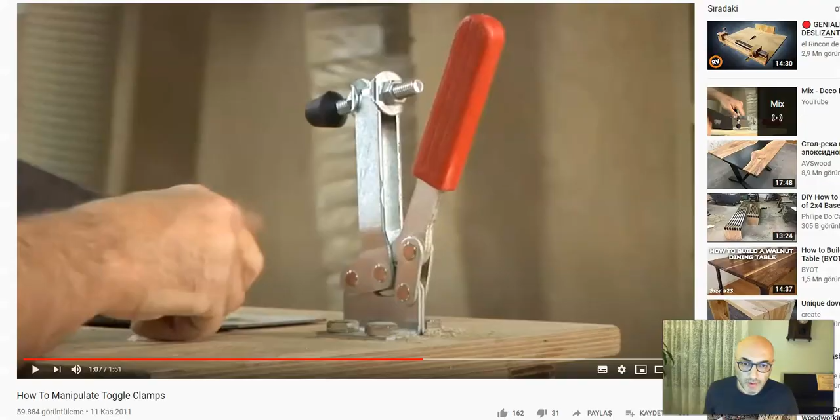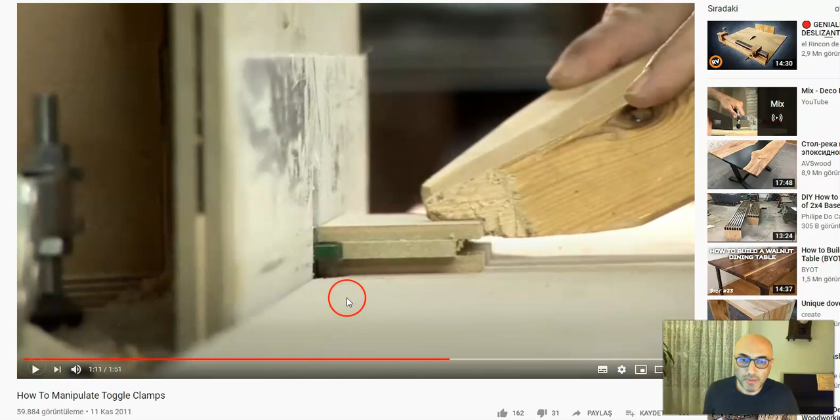So to describe what a toggle clamp is, I want to share with you a very short YouTube video. So just watch it. Okay, you see the action? Let's try to see once again. So you have this red handle here, and then this clamp here, clamping an item. So you apply force on the red handle, push it down, and then you clamp it. You hold a material, like squeeze a material. So that's the idea of a toggle clamp.

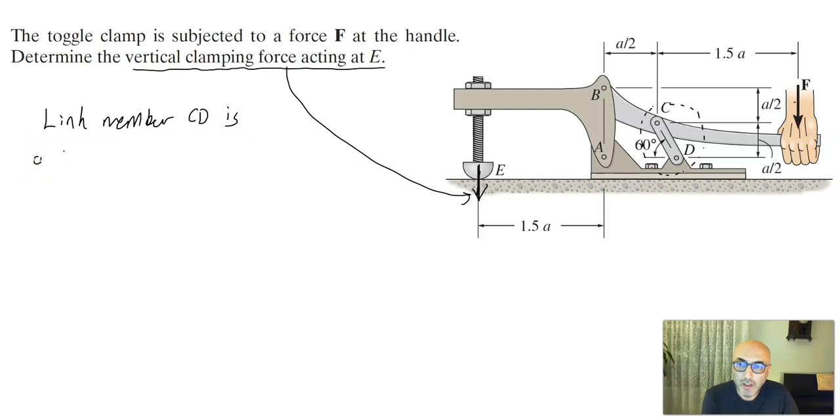As for the solution, realize that there is a link element here, CD. That link element CD is pinned at both ends, so we can easily realize that link member CD is a two-force member. Solution of such problems becomes easier once we realize that there is a two-force member within the system, because it gets easier to find the unknown reactions within a free body diagram.

So we're going to start by drawing a free body diagram of the handle itself and separating the link element from the handle. So member BC, and at this point we have a force applied. So free body diagram for the handle here. We have an applied force F here, at a distance 1.5A. And we have a distance here A over 2, and we have a pin here, that's pin C, and another pin. So at point B there's a pin, and at point C there's a pin.

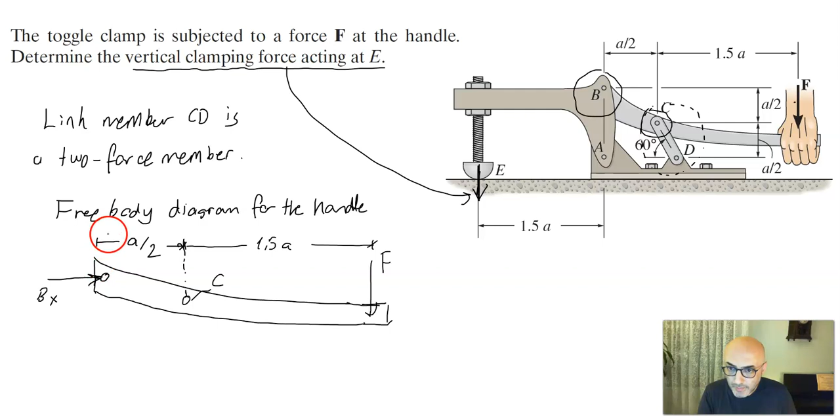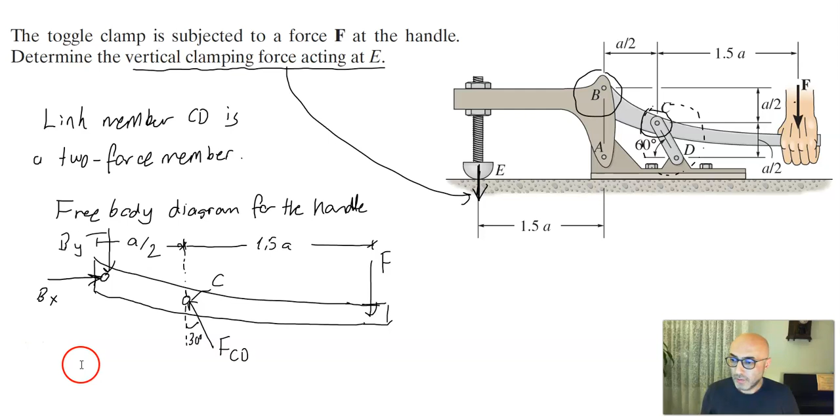So at point B we have two support reactions, Bx and By. And at point C, at a 30-degree angle, through the link CD, we have an applied force FCD from that two-force member. And this angle is 30 degrees. Okay, we have this distance. This is not a very good drawing, but let's assume that this is A over 2, even though it seems unequal.

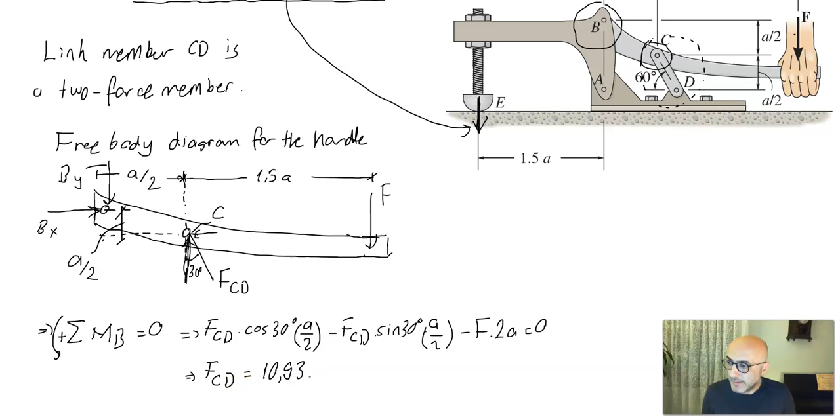On this free body diagram, we're going to write moment equilibrium around point B to find FCD. We have two components of FCD. The vertical component is FCD times cosine 30 degrees, and A over 2 is the perpendicular distance to point B. For the horizontal component, that's sine 30, with lever arm A over 2, and we have the force F times 2A, equals 0. That gives us FCD equals 10.93 F, a function of F.

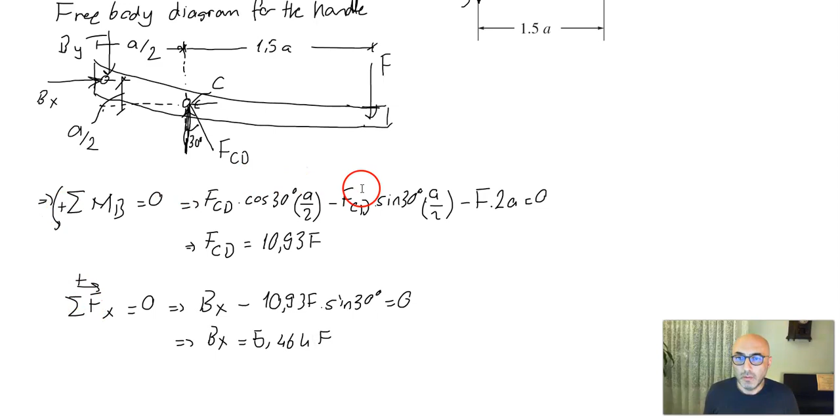So for Bx, we can write sum of the forces in the x direction equal to 0. So Bx minus FCD times sine 30, where FCD is 10.93 F, equals 0. So Bx will be equal to 5.464 F. Let's remember what we are trying to find eventually: the vertical clamping force at E. So we have found Bx, and we're going to continue now.

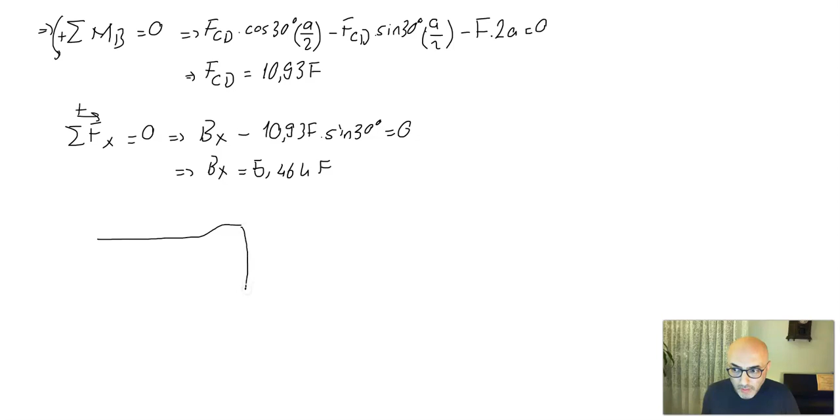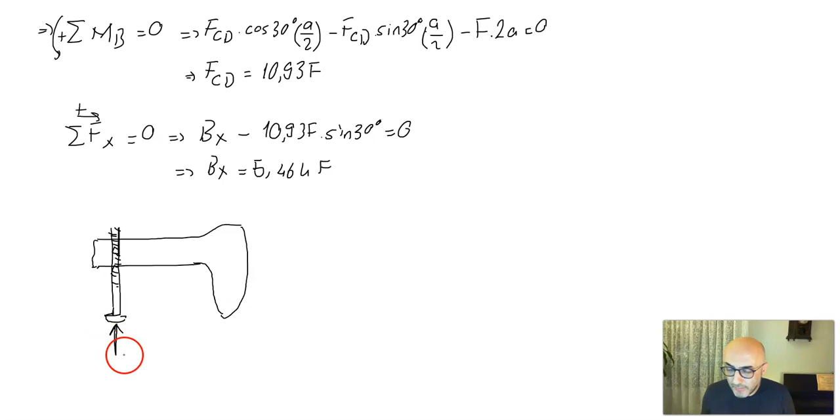So let's draw a free body diagram for this piece here that I am now hatching, including this one as well. The free body diagram for that part has this going up and then something going down, and then this part here. This is a bolt here with some threads on it. Essentially we have this reaction force, the vertical clamping force Fe, which is what we are trying to find.

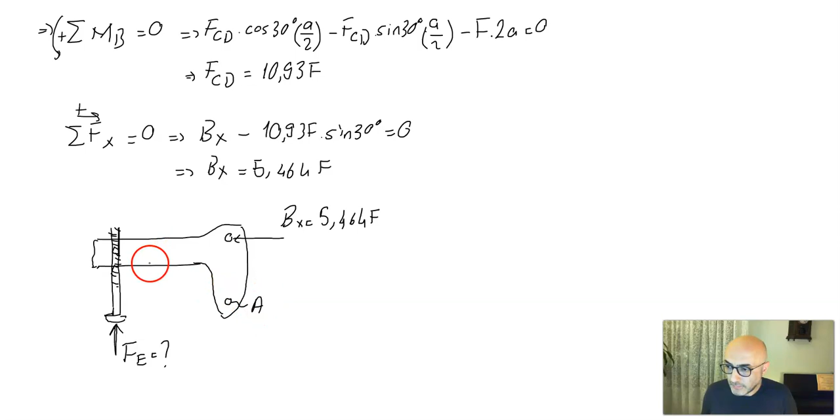So we have point A and point B. We just found Bx equals 5.464 F. The distance between Fe and point A is 1.5A, and this distance is A. If we write moment equilibrium about point A equal to 0, we are excluding the effect of By. We could have found By, but we didn't, because the line of action of By passes straight through point A, so it's outside the equation. So we are left with Bx and Fe.

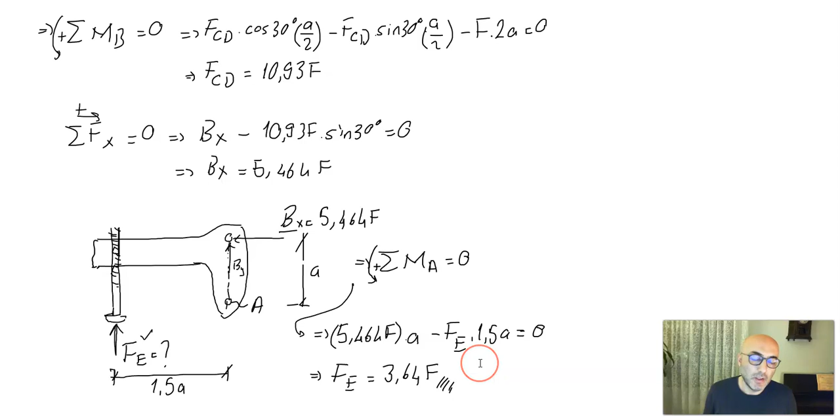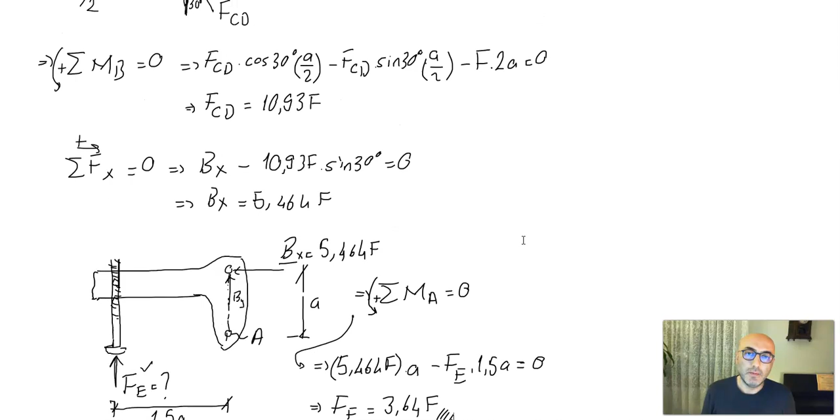This moment equation gives 5.464 F, that's Bx, times A, minus Fe times 1.5A, equal to 0, and we find Fe equals 3.64 F. So that's the clamping force Fe written in terms of F. If F is 10 kilonewtons, Fe will be 36.4 kilonewtons. So Fe is 3.64 times greater than F. That is the solution of this particular problem.